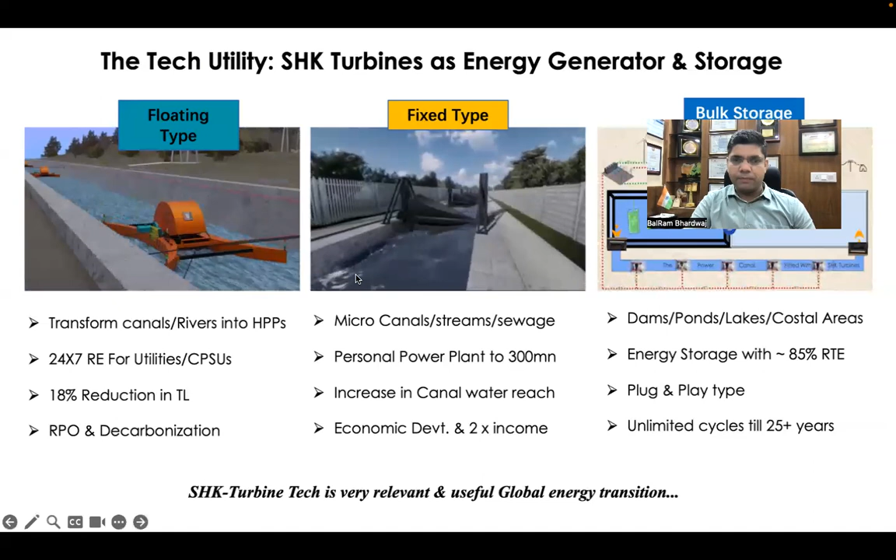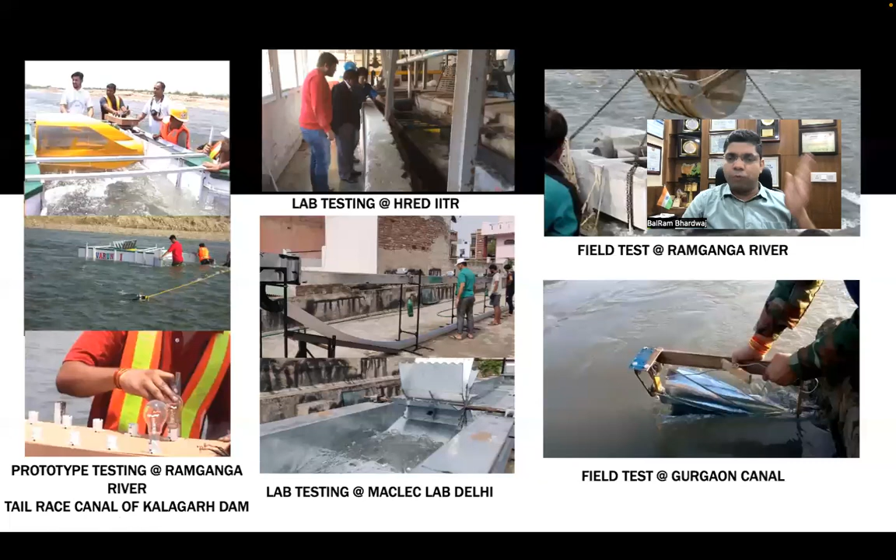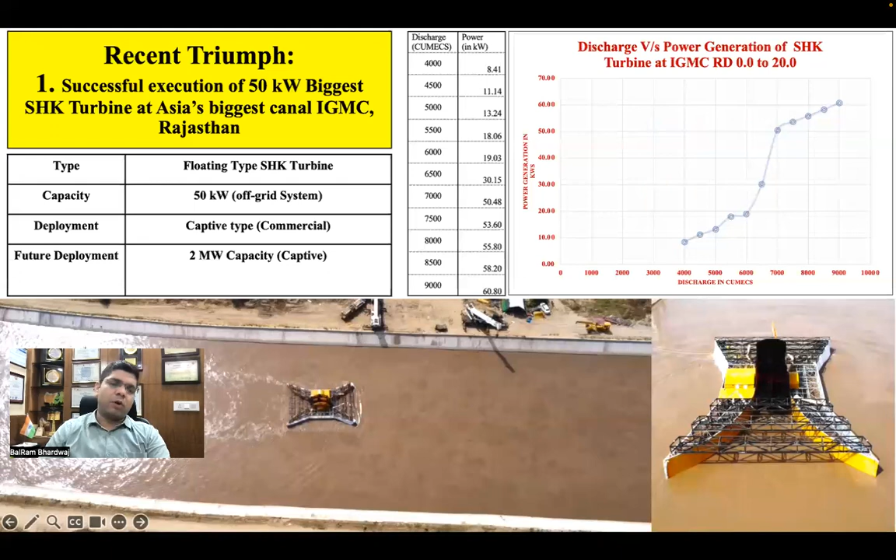The technology has already been tested and approved by various government organizations, and these are the testing setups we did from 2014 to 2018. Recently, we deployed a 50 kilowatt capacity turbine, probably the world's biggest SHK turbine of this kind, in Asia's biggest irrigation canal, and the results are in front of you.

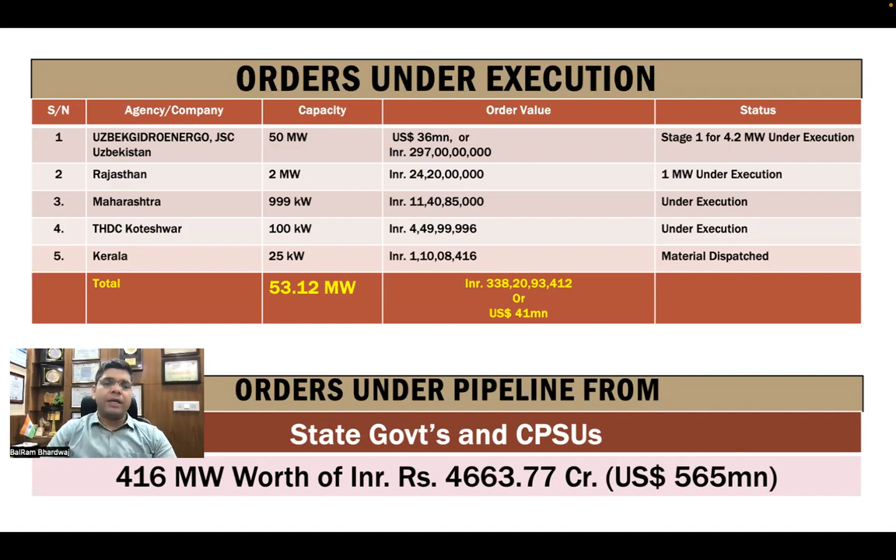Right now, we have more than 53 megawatt worth of plants under execution, worth $41 million, which shows the technology's worldwide acceptability, and we are running in a revenue positive manner.

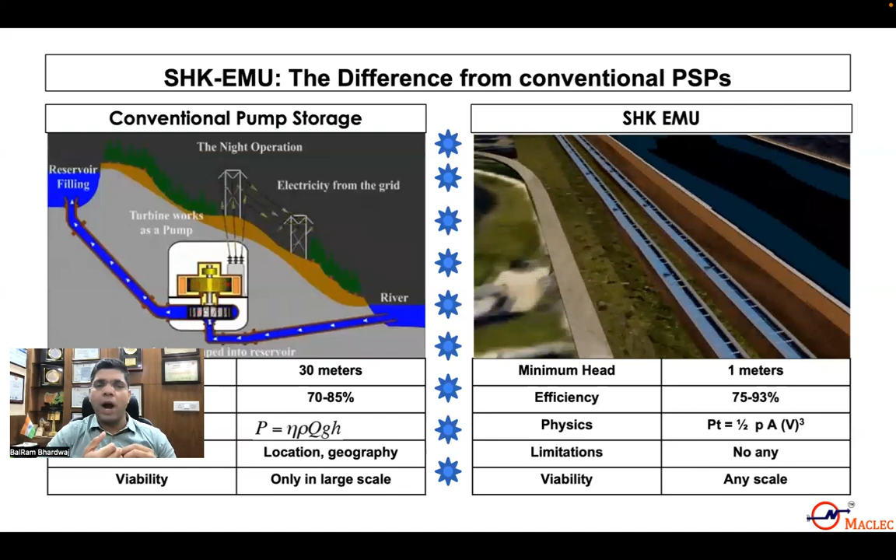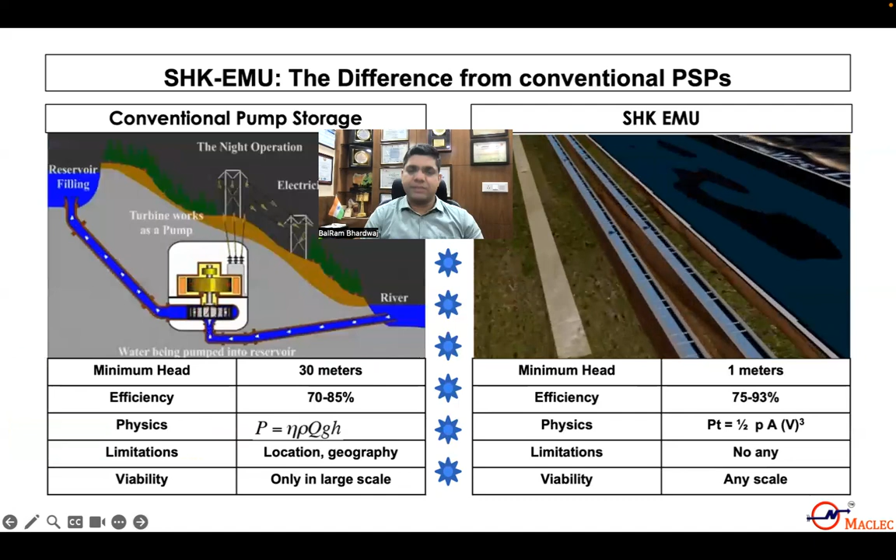The SHK EMU technology is different from conventional pump storage systems because of the head requirement, which is just 1 meter minimum, and there are no limitations, because conventional pump storage systems require at least 30 to 80 meters of head. Here we require just 1 meter, and the physics of our system is completely different than conventional pump storage, which is a gravity-based system. That's the reason it can be deployed. Similar to these turbines, we have invented ones which can be deployed in any canal system.

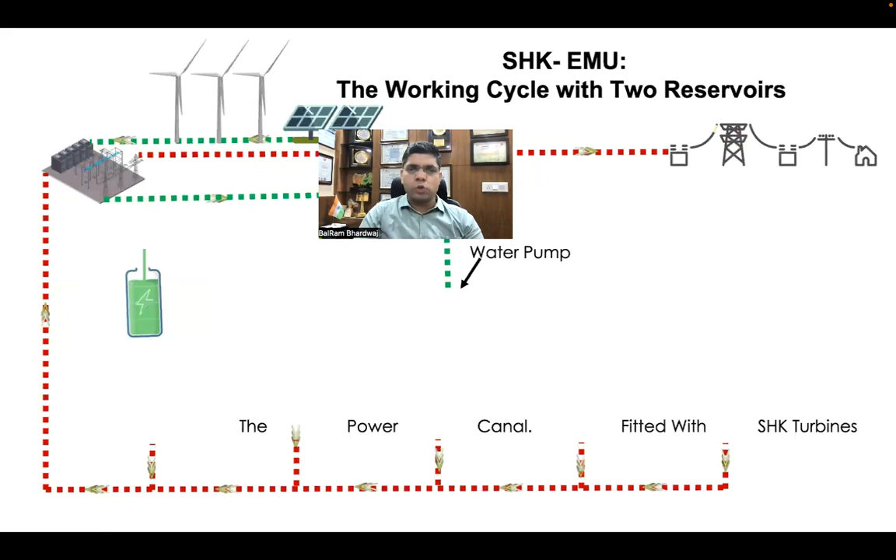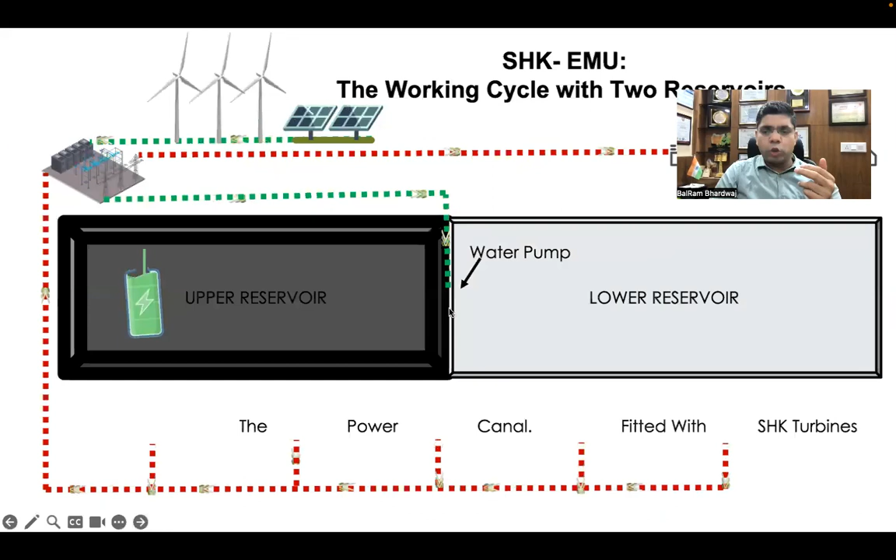So how does the system function? Very simple. We require two reservoirs: an upper reservoir and a lower reservoir. When we have surplus energy in the grid, power can be drawn from the grid to pump water from the lower reservoir to the upper reservoir. Once the water is pumped and the reservoir is full, the energy is stored.

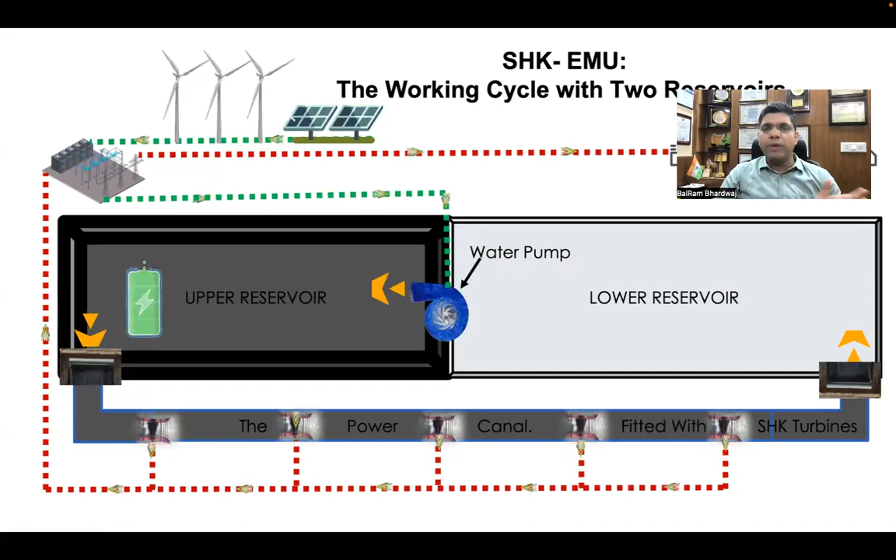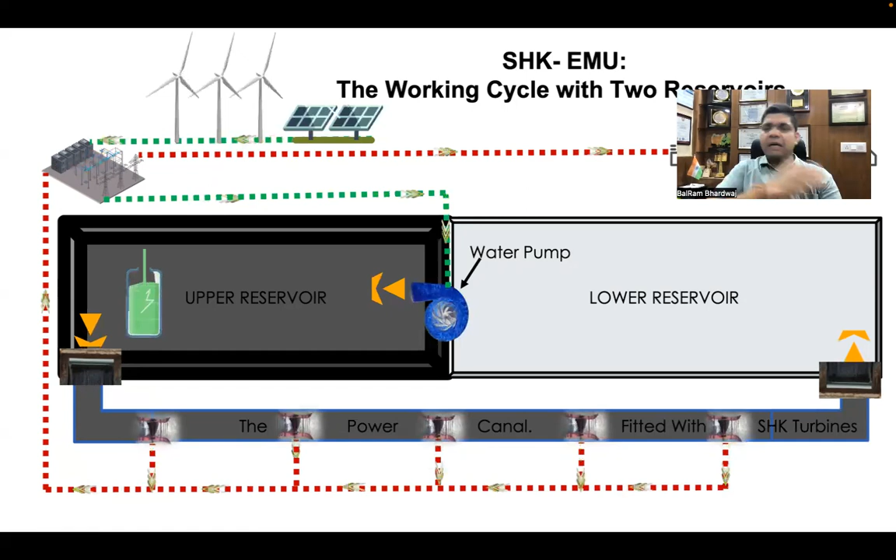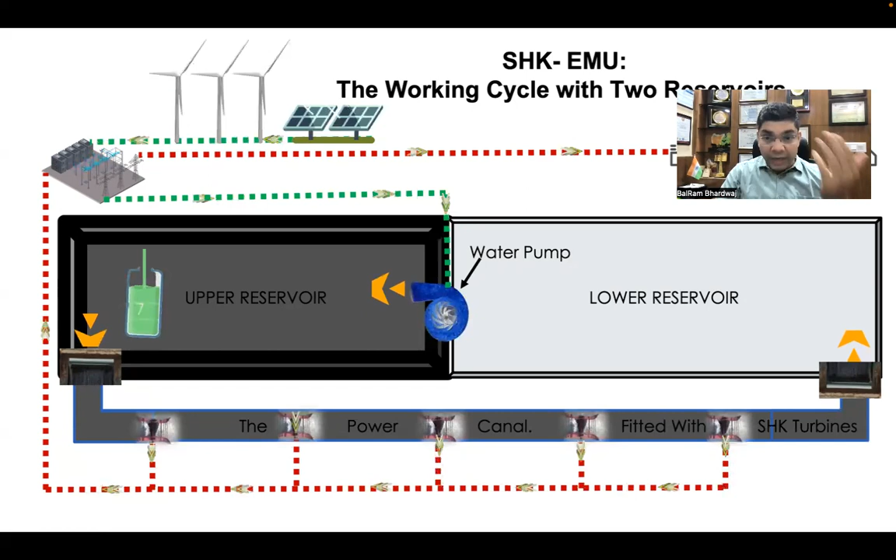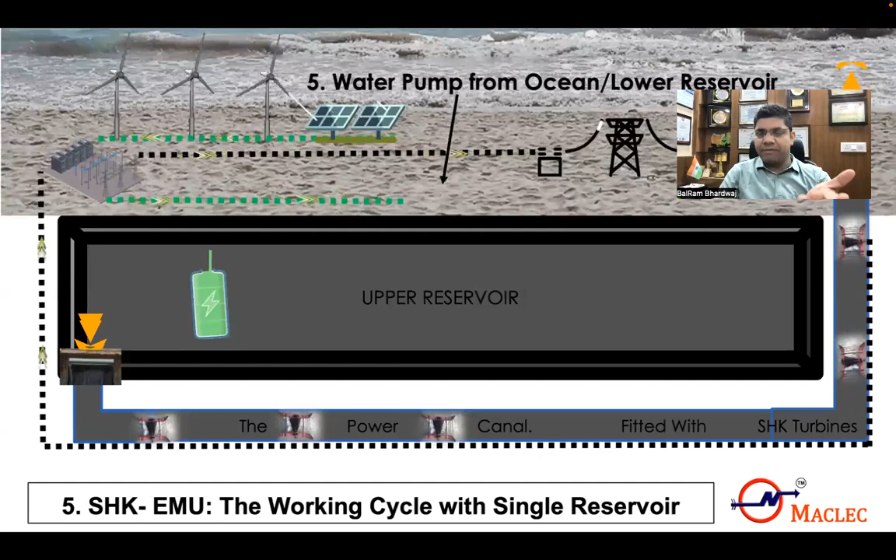When you need to draw the energy back, you channelize the water through the canal, and the turbines deployed in the canal can recover up to 85% of the power, and the water gets stored in the lower reservoir. The cycle rotates continuously. That is the two reservoir system. In the case of the ocean, you require just one reservoir, and the ocean itself can be utilized as the lower reservoir, and the rest of the system will be the same.

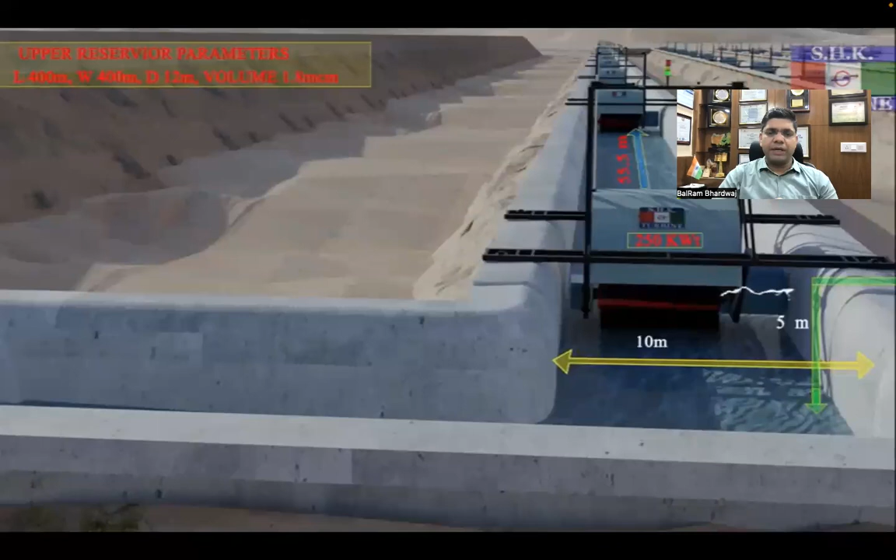Considering the same parameters, we can deploy this SHK energy system in any running stream, and this is the 3D explanation. In that case, you can see the upper reservoir is next to the ocean, so just one reservoir is required. A bunch of hydrokinetic turbines are there, and the power is collected and fed to the grid.

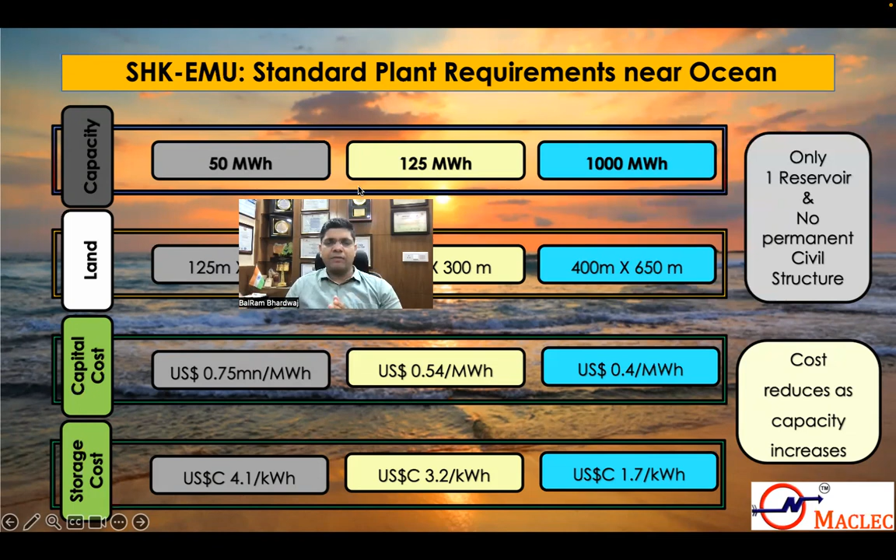Similarly, for 50 megawatt hour, we require just a small area of about 125 meters by 180 meters. For 1000 megawatt hour capacity, we require just 400 meters by 650 meters. And the cost is relatively reduced as capacity increases.

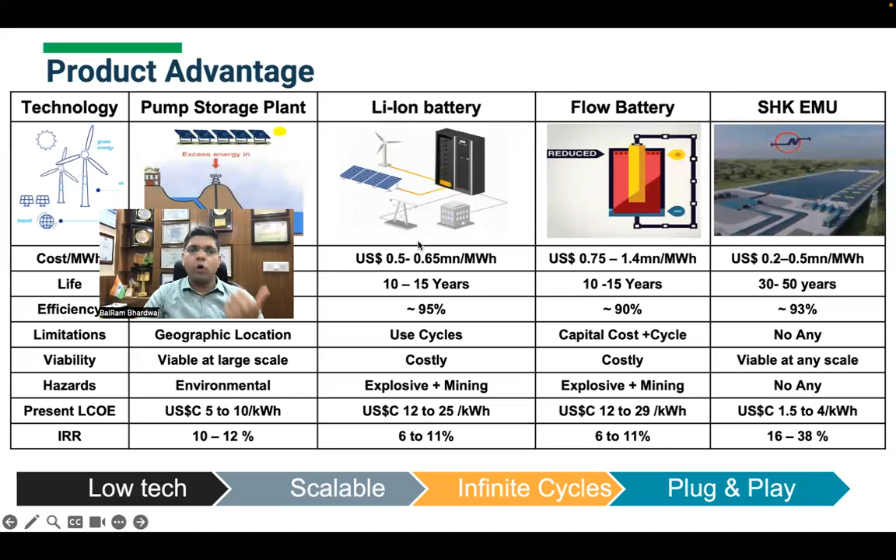This is the comparison between conventional technologies like lithium-ion batteries, flow batteries, and our turbine system. This system has a cost benefit over lithium-ion batteries and flow batteries, and also in life cycle, because it can run continuously like a hydropower project, and it requires very low deployment cost and operation cost.

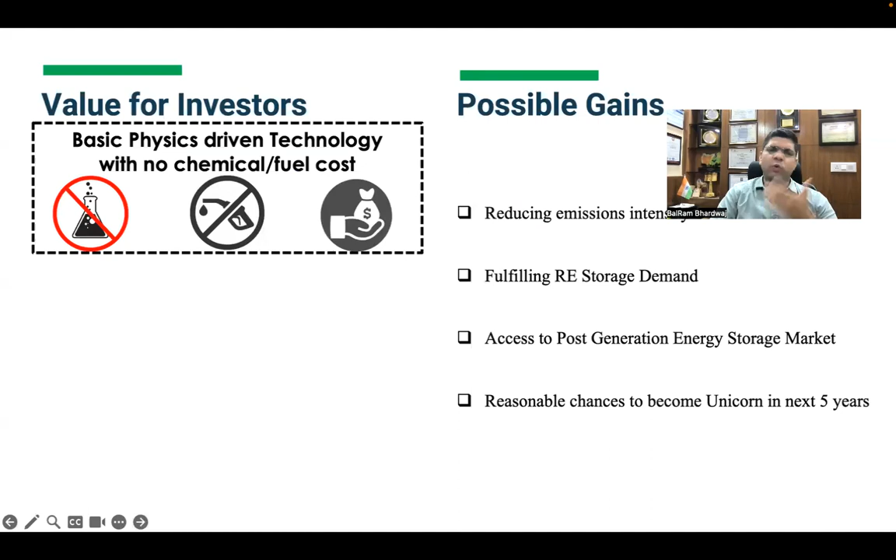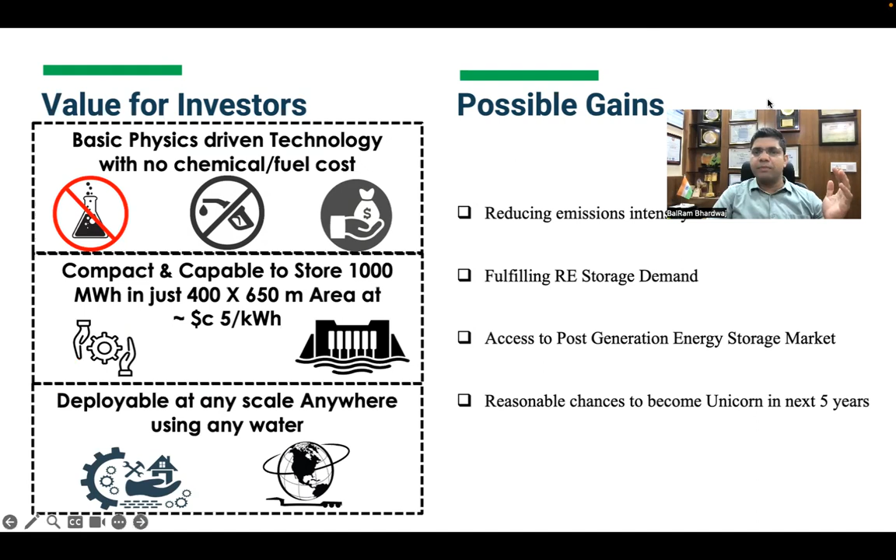By using this technology, our investors get a basic physics-driven technology with no chemical fuel cost, and compact, capable storage of up to 1,000 megawatt hours in a very small area. It can be deployed anywhere in the world, which can reduce emission intensity, fulfill energy storage demand, and give access to the post-generation energy storage market, which is $1 trillion right now, with reasonable chances to become a unicorn in the next 5 years.